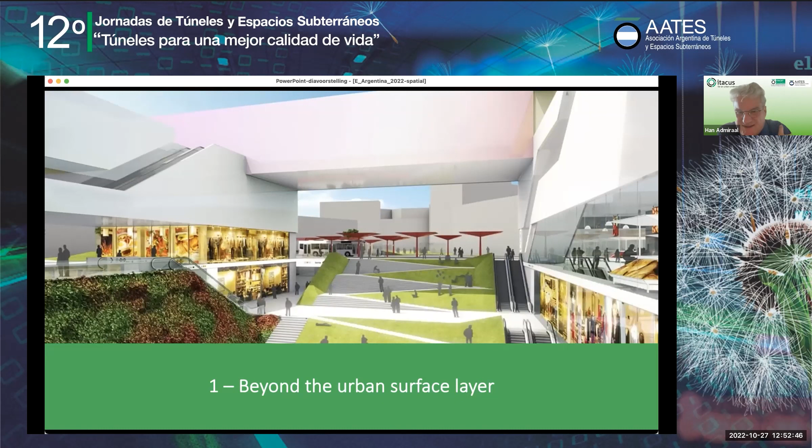I'll continue with spatial design, creating a new urban tissue, and I think that kind of wraps up all that we've been talking about up to now. And what it really means is that we need to start thinking beyond the urban surface layer. So we have to break away from this idea that we need to bring everything below the surface that we don't want at the surface, but rather look at the subsurface as an additional possibility, as an extension to what we do at the surface in our cities.

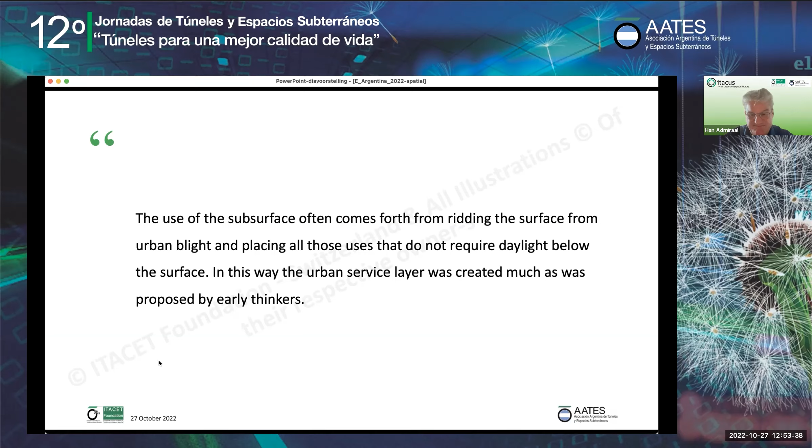You can imagine the same happening, for example, in Glasgow. The city of Glasgow is built on top of a lot of mines below the city, and nobody dares think what would happen if some of those galleries inside those mines, which have been long abandoned, collapse. That could lead to sinkholes appearing as well.

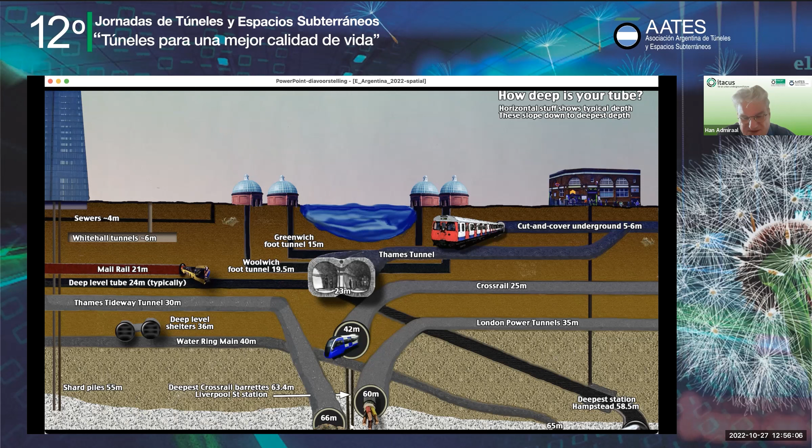So the way that people started using the subsurface means that we have to go deeper and deeper, rather than saying, okay, we should reserve the top layer, for example, for transport. Because if you place all those transport links deeper and deeper, it basically means that we have to transport people over those distances as well.

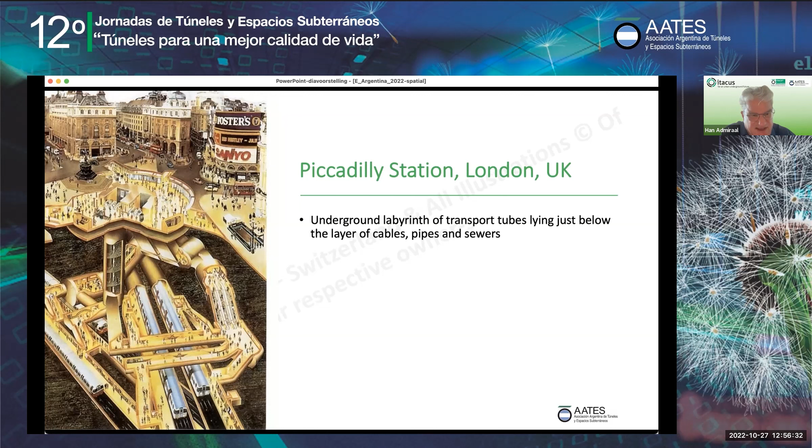And here you can see an interesting drawing of the labyrinth, basically, of all these tubes and tunnels below Piccadilly in London. It's a labyrinth of transport tubes, which lies just below the layer of cables, pipes, and sewers, and it doesn't really leave a lot of space for further development.

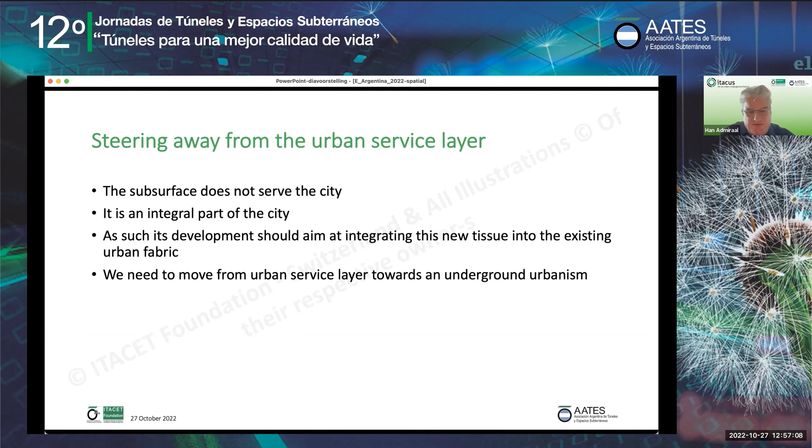So we have to steer away from the urban service layer, and the first thing that we need to do is to consider that the subsurface does not serve the city. It is an integral part of the city. As we said earlier, it is what provides life to the city. We look at the subsurface for a lot of services as well. And as such, its development should aim at integrating this new tissue into the existing urban fabric. And we need to move away from this concept of the urban service layer towards an underground urbanism. And there are various ways in which we can do this.

And then designers came up with the idea, can we actually build a second shopping street, a sunken shopping street at the -1 level, and at the same time create a whole new connection between the underground metro, the metro station, and the surrounding area.

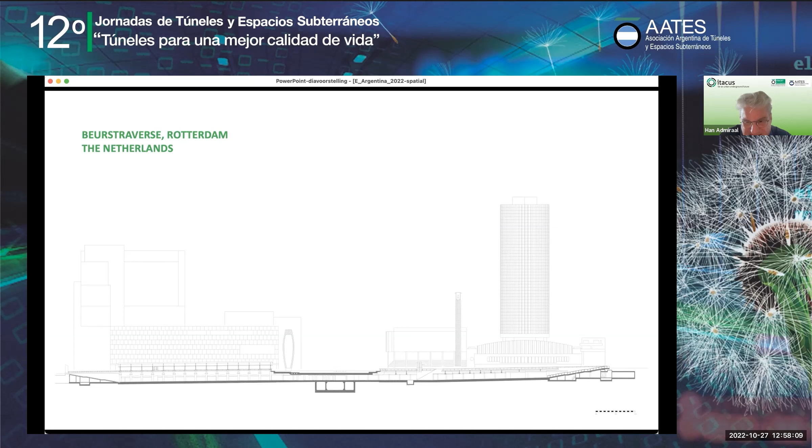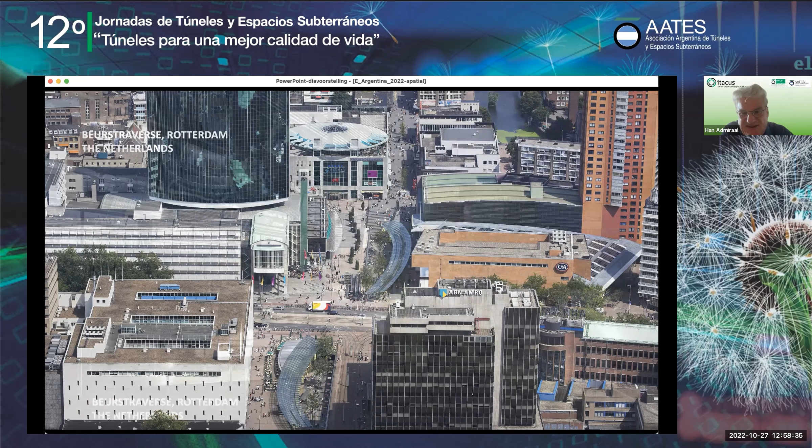And if we take an even better look at it here, you can clearly see how people go down the stairs and enjoy the additional shops that have been created. We have a shopping street at the -1 level. Also note those trees that have been placed there. I talked about the trees that were in the Yaodong, in the sunken atriums. Here you can see those trees planted there as well. There are water features there.

And I think the main point about the way this has been designed is that it's been totally integrated into the urban fabric. People walk into the Beurstraverse and they can shop, they can go to the metro station, they can connect into other stores which have basically opened up their basements into this street.

And it is something that can be used 24 hours a day, 7 days a week. It's totally independent of whether the metro runs or not, or whether the shops are open or not. You can still use it for leisure purposes if you want to. And for me, it's a very good example of how through the spatial design we can ensure that the subsurface actually is integrated and becomes a part of the urban fabric.

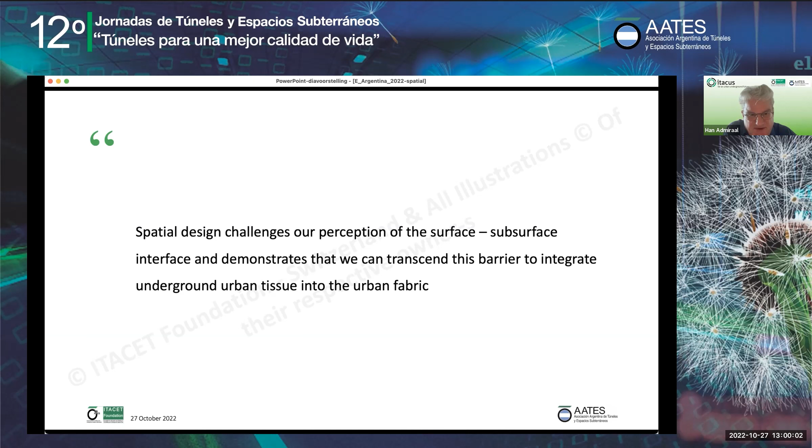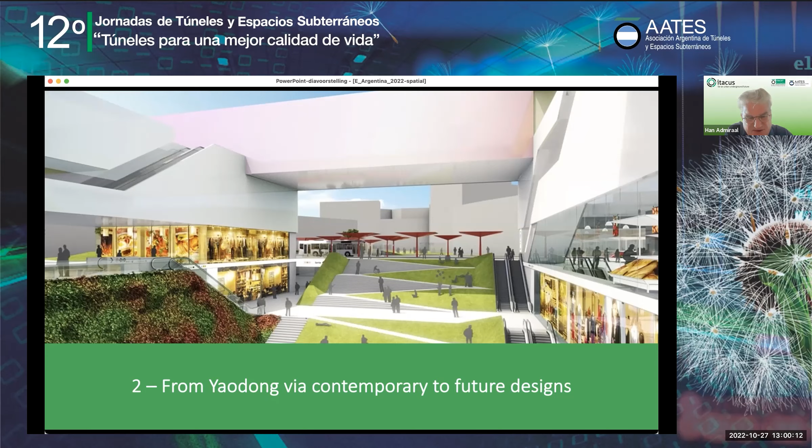So spatial design challenges our perception of the surface-subsurface interface, and it demonstrates that we can transcend this barrier to integrate underground urban tissue into the urban fabric. So let's see how we can move from these Yaodongs via the contemporary to future designs.

If we could confront people as they go through their daily lives, through this station, with new sensations and therefore new ideas, I think that we have managed to take our stations from a servicing role to one that produces things. So what we've done is to take the platforms, the intermediate platforms that you need in order to connect to the different lines or to connect to these spaces that we are lining around the station, and we've oversized them.

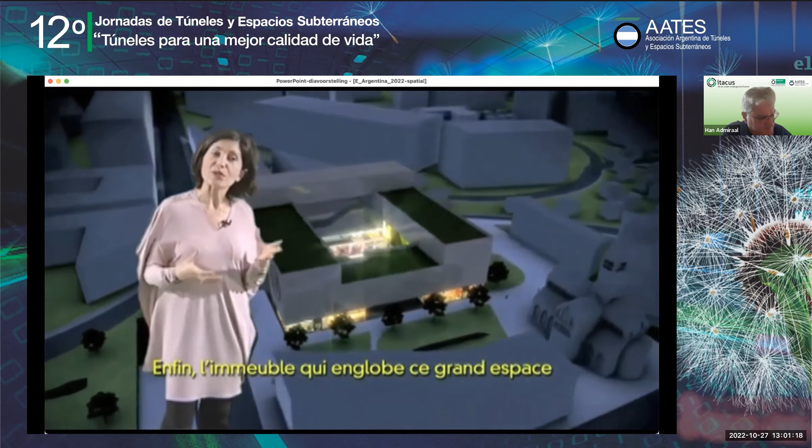And we've also connected them with slopes on which we have ramps, on which we have steps, on which we have greenery. So at any one time, you could be just moving through this space, but you could also just be lying down. You could also be sitting, watching somebody perform. So you can constantly shift between being a spectator or a performer. Also, this building that wraps around this open space, it is designed, or it can be designed, to really become an infrastructure to this space as a space of performance.

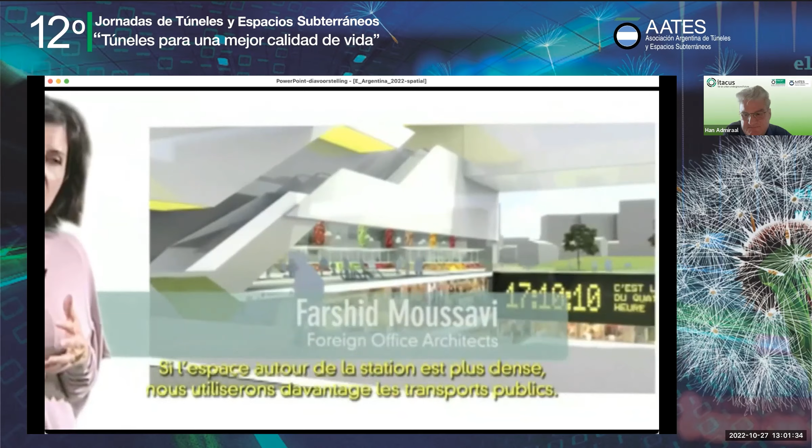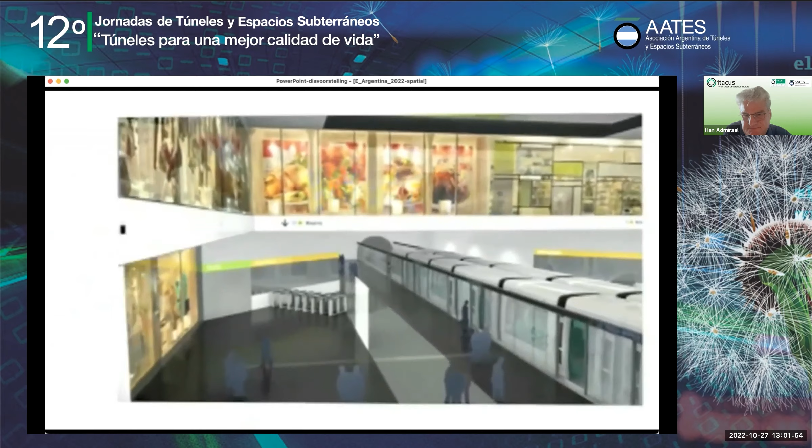We should try to densify around our stations, because it is where it would be encouraging people also to use a lot more public transport, because there will be more reason to go to the public transport places, because you have pleasure and work and convenience. If we can develop an urbanism that is dense, that is mixed use, there will be less need to travel for conveniences. And perhaps travel becomes more of a choice, and travel becomes perhaps more for pleasure rather than for work. That's how we've approached it.

So that was an interesting design. It was a competition that was actually done by the RATP, the Transport Authority of the City of Paris, and Farshid Moussavi explained to us their concept of how they basically opened up the underground stations, much like the example I gave from the city of Rotterdam.

And I think it's this opening up of the subsurface which is very interesting. It's very much like, again, the Yaodong concept, but it kind of shows what is lying below, and in doing so, there's a much better integration of these spaces below the surface with the surface. So Farshid Moussavi sees the future station as a form of urbanism that brings together density and mixed use.

And she basically follows Jane Jacobs in her observations of what makes a street attractive. We have to consider that if we want people to enjoy cities, the streets need to be attractive. They need to be places where people really want to be, where they can meet other people. That is basic. In essence, a city is about people being able to meet each other and enjoy the city.

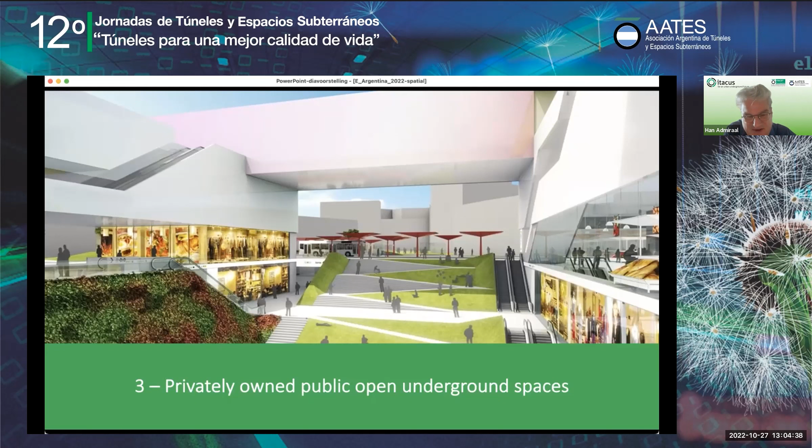So let's talk a little bit about privately owned public open underground spaces, because this also, when it comes to spatial design, is something that we need to think about when we want to create a new urban tissue. It is more than just developing underground spaces. It requires publicly accessible spaces. It must be designed to allow this, as contemporary spaces act as private spaces, even if they are publicly owned and operated.

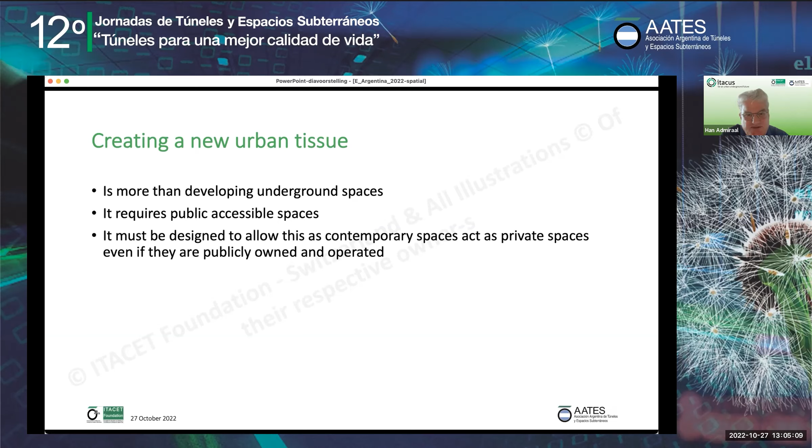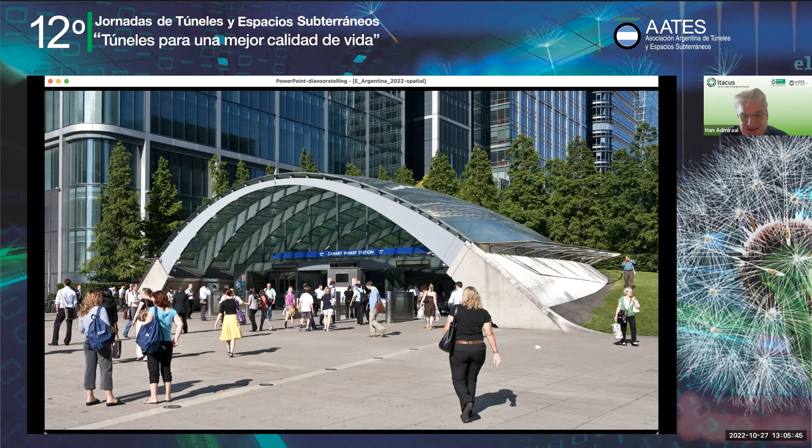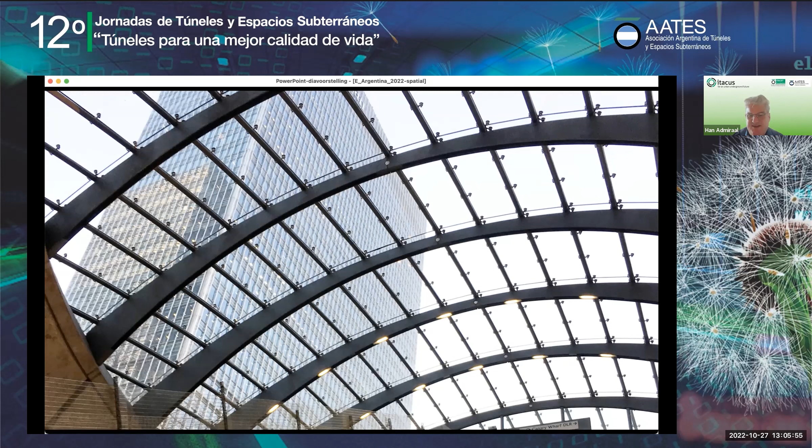And the glass canopy, when you come out of the station, you're on the escalators and you look out through the glass canopy, you see the surrounding buildings of Canary Wharf, and it really is a delight to do so. But to all intents and purposes, the public domain is actually limited by this station. In this schematic that we made, you can see the two underground lines, and you can see the station, and you can see the canopies on both sides of the station.

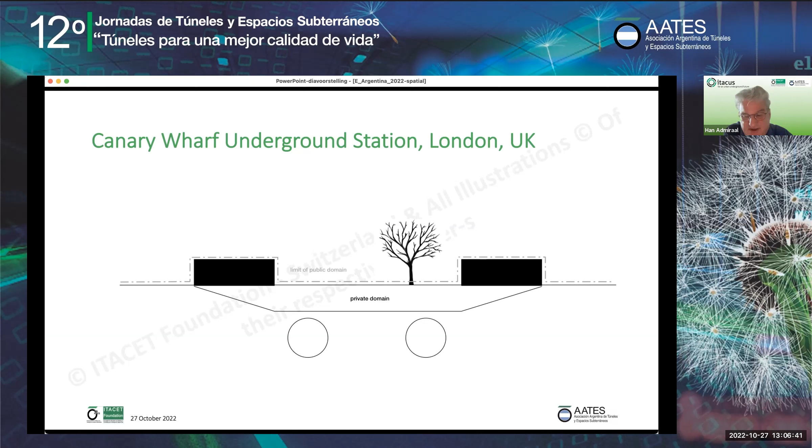But basically, on the outside is where the public domain is, where you can be 24 hours a day, 7 days a week. If you want to go down, you have to pass through the barriers and you have to have a ticket. So in essence, even though it's a public service, it is a kind of privatized domain which lies below the surface, which is not open and available to everyone.

And the same thing happens when we talk about the underground city in Montreal or the PATH in Toronto. What we actually see is that these came about through basement developments below office buildings that were then connected by urban corridors, if you like, and that connected into the actual metro system of those cities. But again, the essence is that the domain below the surface is private. You cannot enter certain areas after the office buildings close.

You cannot enter the system after the metro closes, and in reality, even in Montreal, the underground city plays a vital role for the city, because daytime temperatures during summer can go in excess of 40 degrees, and during winter to minus 40 degrees. So people like to be below the surface because it gives them shelter. It gives them another way of enjoying the city without having to feel the elements.

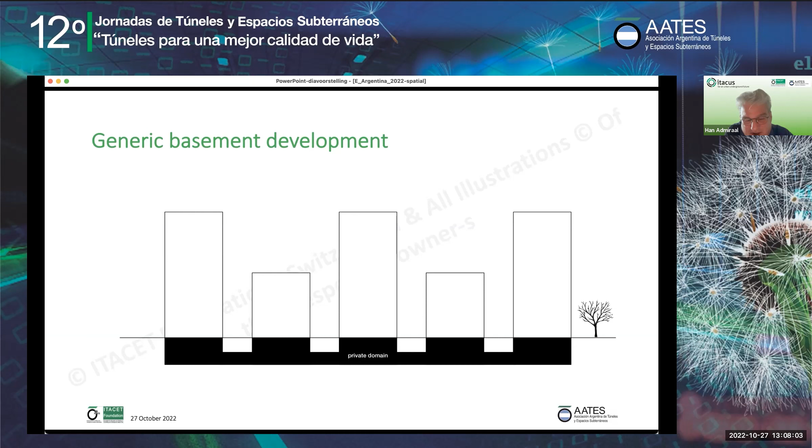So you can see that there are these beautiful squares that have been created beneath buildings, and then you move off into the corridors to either the next building or to a metro station or whatever. But again, it is not accessible all the time. Now compare that with the example I gave earlier of the Beurstraverse, which here you can see again more schematically.

You can see the staircases on both sides. You can see the department store I talked about, into which the access is provided, and the metro line and the station there. But the whole point about the Beurstraverse is that it's been designed in such a way that you can actually access that whenever you like. So rather than it being a private domain, it is a part of the public domain.

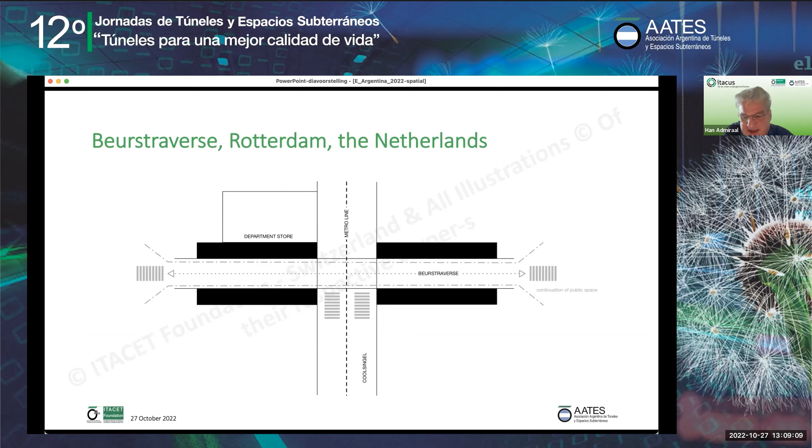Now, if you go to San Francisco, then San Francisco is a really high density city. I don't think anybody will deny that. But they actually have very kind of secret spaces that are called POPOS. They are privately owned public open spaces, and they can be on top of buildings. They can be inside buildings at the ground level.

But basically what San Francisco in its ordinance says is that any building that is built must provide a certain public open space. So you can actually go through the hotel to this rooftop garden and just sit there and enjoy the city. And it's got nothing to do with the hotel. You don't have to be a guest of the hotel. It is essentially open to everyone.

And I think that is the kind of idea that we should also have when we look at underground space development. Even though they are private spaces, we should design them as if they are public spaces, because only in that way can we truly say that they are contributing to the city, that we are actually making the subsurface, that new tissue that we are creating below the surface, we are integrating that into the urban fabric.

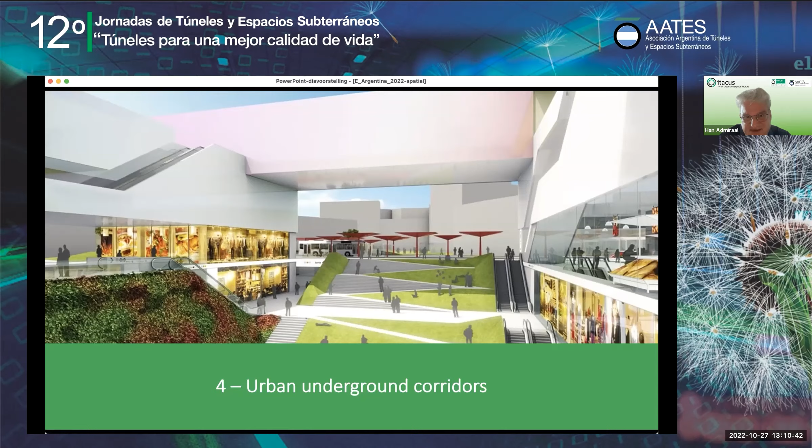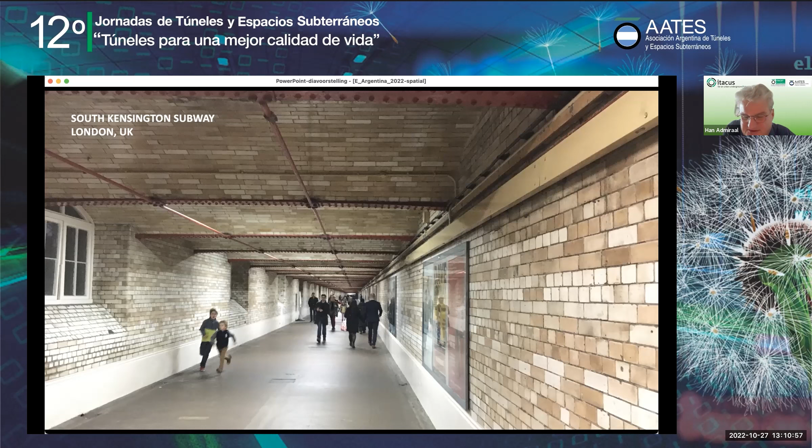And one essential element of that are urban underground corridors. I already mentioned that when we were talking about Montreal. Here's an example of the South Kensington subway in London, in the UK. It doesn't really look very spectacular, but it does provide an interesting corridor to move from one side of the street to the other side. But at the same time, it also kind of opens up into adjacent buildings, which, hopefully, I still have a picture of that in a minute.

But those urban corridors, in effect, it's about connecting the dots. Those corridors connecting underground basements or atriums lie at the core of the development of a new urban tissue below the surface. Because in absence of those corridors, all we are doing is creating underground incidents, as we call them in our book. We are developing things below the surface, but they're just dots. You cannot access them unless you come from the surface, and to go somewhere else, you have to go back to the surface. And in connecting the dots through those corridors, we really start to develop the subsurface in an interesting way.

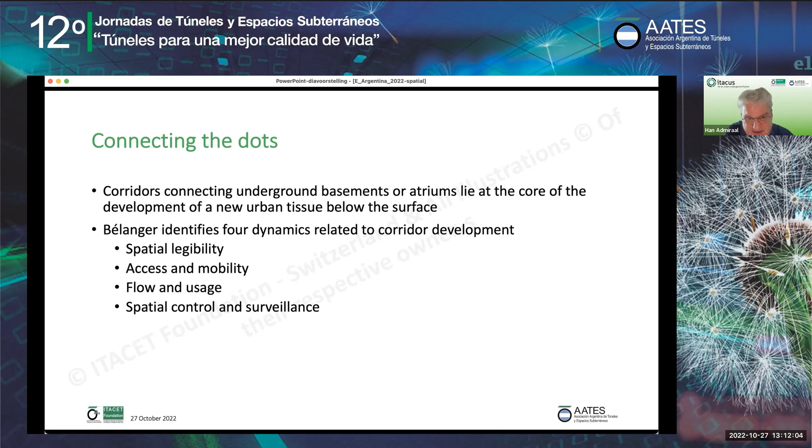And Pierre Bélanger identifies four dynamics which are related to corridor development: spatial legibility, access and mobility, flow and usage, and spatial control and surveillance. And we discussed those more in depth in our book.

But because it has this opening, there's a totally new dynamic that comes into play, and also the entrance is made attractive, which then again leads to a better enjoyment, if you like, of the usage of that corridor, even though you might not even want to enter the Victoria and Albert Museum. But just this one opening kind of enhances the whole urban corridor, and that's a very essential design element that we need to consider.

So planning and design form the basis for the development of a new urban underground tissue. Leaving the development unchecked and subject to the whims of private developers and owners can in the long term only lead to a less desirable result. And this is a quote from Pierre Bélanger, who actually studied the development of the PATH in Toronto, and he wrote quite a famous article about this, which was published in Tunnelling and Underground Space Technology, TUST. And I think this is what lies at the core of our argument why we need to work together with the urban planners.

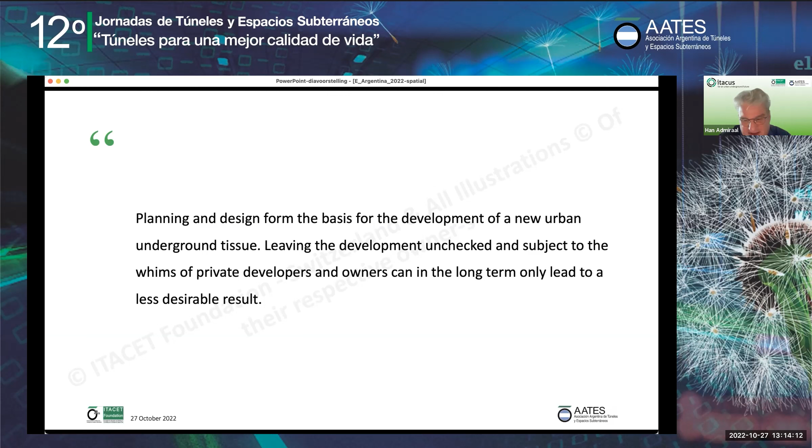You cannot just leave it up to private developers and owners to develop the subsurface in their way, just create all these iceberg mansions or basements below buildings, or even leave that unchecked and leave it to their whims. I think that will only lead to something that we really don't want to see.

So in summary, promoting the subsurface as space for those objects that cause urban blight inevitably leads to the creation of an urban service layer. And if there's one takeaway I hope you get from this training, it is that we need to stop using this as an argument why we should be using the subsurface. It is not just about placing things below the surface that we don't want to see at the surface, because if we do that, we are basically just contributing to creating that urban service layer.

But when we really want to create underground spaces, they need to demonstrate a relationship with the surface and with other underground spaces. And we can do that by looking at the way that we transition the interface between the surface and the subsurface. If we do that through narrow staircases, then nobody's going to see that relationship.

It is purely functional. If we open up those spaces, like the example that Musavi gave of their idea about the metro station of the future, if we open it up really in a grand scheme, even Canary Wharf, what they've done there, then there is this demonstration of that relationship between surface and subsurface.

Planning and design of urban underground spaces is required to prevent a self-replicating network coming into existence that is privately owned and operated. And this is essentially what happened in the two examples I gave from Canada. I can remember visiting Montreal, the underground city, with Antonia at one time. And I asked quite an innocent question.

I said, well, if somebody has an accident below the surface in the corridor or in one of these squares, who's actually responsible for getting help for that person? Is that seen as part of the owner of the building above? Does he have to organize something, or have his own people look after the person, or is it the same as when somebody goes down in the street? How do the emergency services find this person? And actually it went pretty quiet. Nobody actually had an answer to this question.

So you can see that with these self-replicating networks that are privately owned and operated, the questions that you would ask at the surface when it comes to public spaces are not asked below the surface. And we really need to start avoiding that.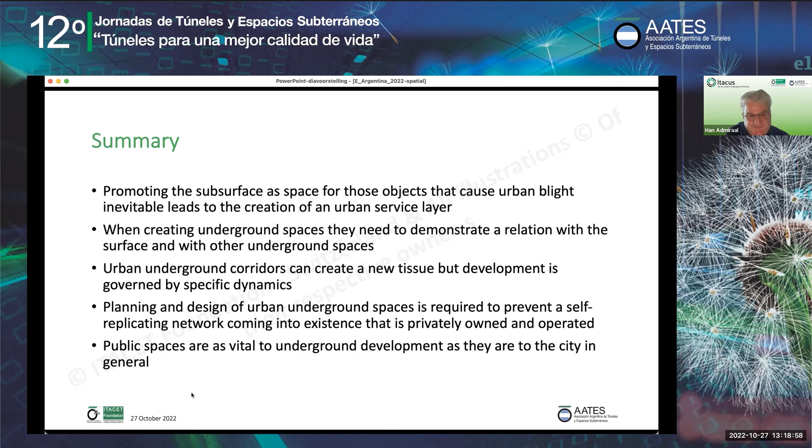So the vibrancy of underground spaces can only come about through sufficient accessibility and by providing the variety in uses that make plazas and indeed streets attractive places in which to exist. And I think this is really the core of what we should be thinking about when it comes to spatial design, and when we have this ambition to extend the city into the subsurface.

So I'm just going to read that one again because I really like it. The vibrancy of underground spaces can only come about through sufficient accessibility and by providing the variety in uses that make plazas and indeed streets attractive places in which to exist.

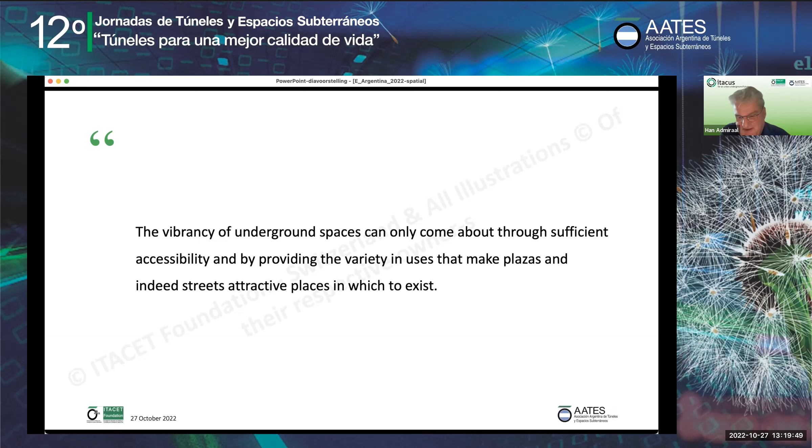And with that, I come to the end of this presentation, and I will quickly move on to our final slides because they contain some more information. But basically, we've come to the point where we can do question and answers, and then Antonia and I will wrap up.

Yes. Okay. As far as I can see here in the question and answer box, there are no further questions.